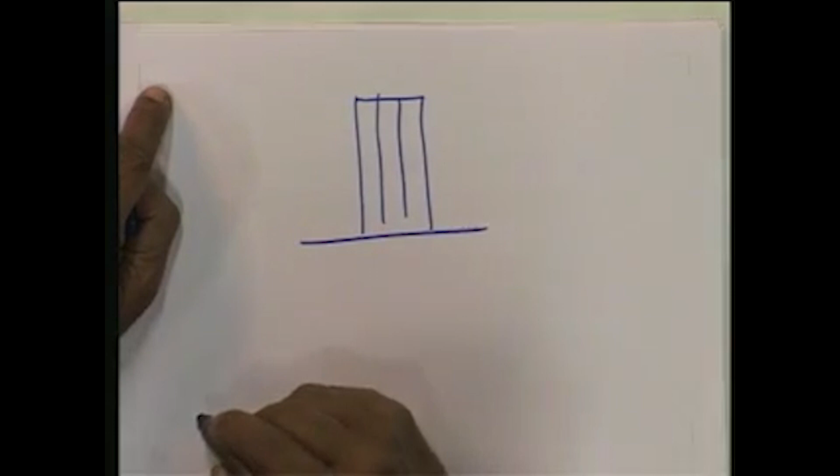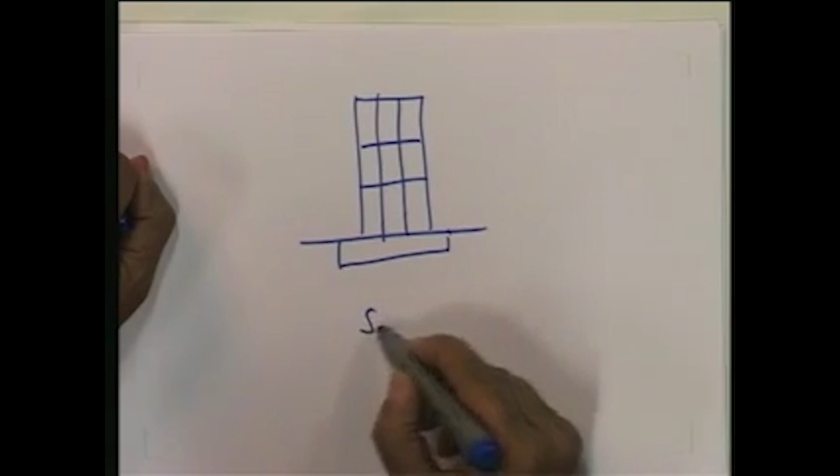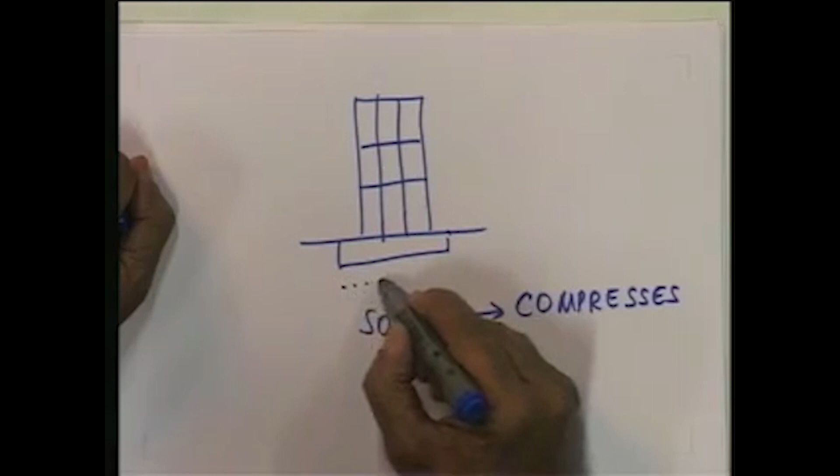See, for example, suppose there is a building and let us say there is a foundation. Let me take a hypothetical single foundation. This foundation is going to impose stresses on the soil, due to which the soil is going to compress, and in turn this results in a settlement of the foundation and hence the building. The building as a whole also settles down.

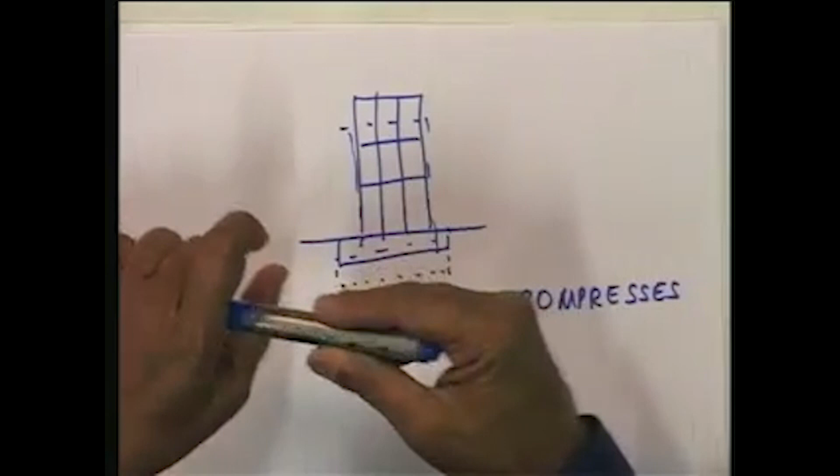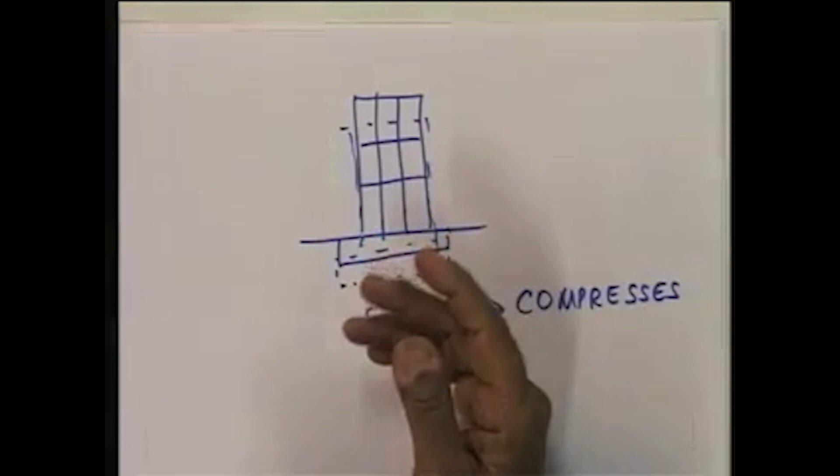Now, you can imagine that if the building settles down uniformly, perhaps the building will remain intact without undergoing any distress. But imagine the contact pressures not being uniform, the soil not being uniform, the foundation is then likely to undergo non-uniform settlement due to non-uniform compression of the soil. Imagine this building tilting like this. It is not going to be comfortable for the building at all when it tilts like this.

When it tilts, it may still remain in equilibrium, maybe momentarily, but if the non-uniform part of the settlement goes on increasing with time, then the building is definitely not going to be in equilibrium. It is going to undergo tremendous distress, which will manifest itself in the form of cracking of the building, cracking of its beams and columns, and in general disrepair. Now, at this point of time, your mind, I am sure, would have gone to visualizing a very well known building of this type.

That is the Leaning Tower of Pisa in Italy. The Leaning Tower of Pisa is an excellent example of a building or a structure that has undergone non-uniform settlement due to non-uniform compression of the soil below. The word settlement is related to the displacement, uniform or non-uniform, that the building will undergo. So, now what we have is a word called consolidation, which refers to the phenomenon that is exhibited by the soil when it is subjected to load.

That is the cause, and as a result of this consolidation, we have settlement of the building, otherwise termed as the displacement of the building, and that is called the effect of consolidation, the settlement. So we are actually dealing with a cause and effect. The cause is a phenomenon, the effect is a manifestation of a displacement.

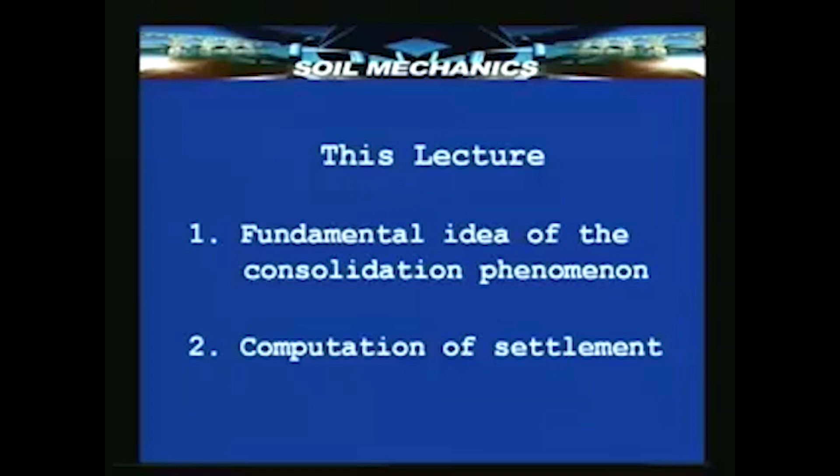In this lecture, we shall be seeing the fundamentals of the phenomenon of consolidation, and we will also see a simple technique for computing the resulting settlement due to exhibition of this consolidation phenomenon by a soil. As in the previous series of lectures, we raised a series of questions and tried to answer them. In the same way, in this series also, we shall raise a few questions.

I did explain the term consolidation as a phenomenon exhibited by a soil when it is subjected to some load. Having already seen in the previous set of lectures on stress distribution something called stress strain relationship for a material like soil, we can relate ourselves to that concept here also. After all, here also we are applying a load and visualizing the possibility of a compression, a displacement, or a change in volume, which is nothing but settlement.

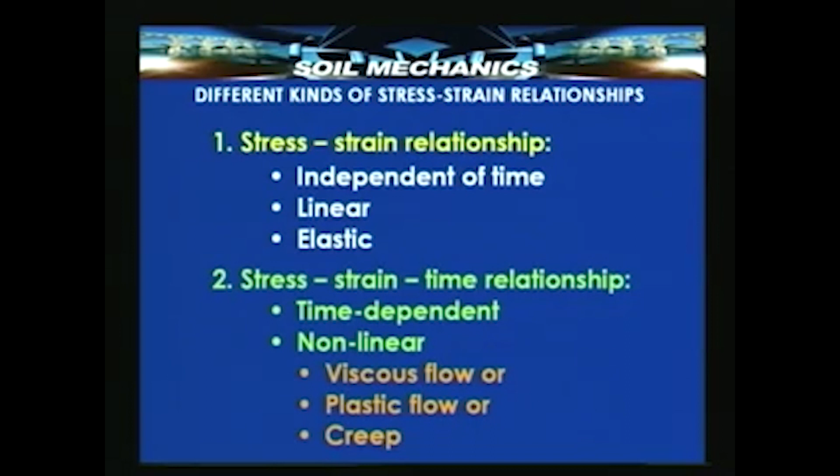So we have to bring in time in this phenomenon of consolidation, which we want to understand. Here it is not merely an instantaneous phenomenon where you apply a stress and there is a resulting elastic strain. This is also complex in the sense that it is not linear. The stress strain relationship is not linear here. What are the possible relationships then? They are all non-linear, and there are different possible relationships.

Viscous flow, that is, the soil undergoes displacements in a manner similar to a viscous liquid that moves. Or imagine a plastic material. It is not difficult to visualize what a plastic material is. You apply a certain stress, it will undergo a certain strain which may not be recoverable. Imagine also another form of this nonlinear behavior, that is creep.

You might have already been told what creep is in some lecture or the other. You must already have an idea that creep is nothing but continuously taking place strain under a constant load. Unlike elastic behavior, where the load is applied and there is a corresponding instantaneous strain which is recovered when the load is removed, here we have a load, and with the load remaining constant, the strain goes on increasing with time, and when you change or increase the load, the strain increases further and then again goes on changing with time.

And all these nonlinear forms of behavior are described not simply by stress strain relationships, but by stress strain time relationships. We are going to see one such form of stress strain time relationship which is relevant to the phenomenon of consolidation. Let us see further.

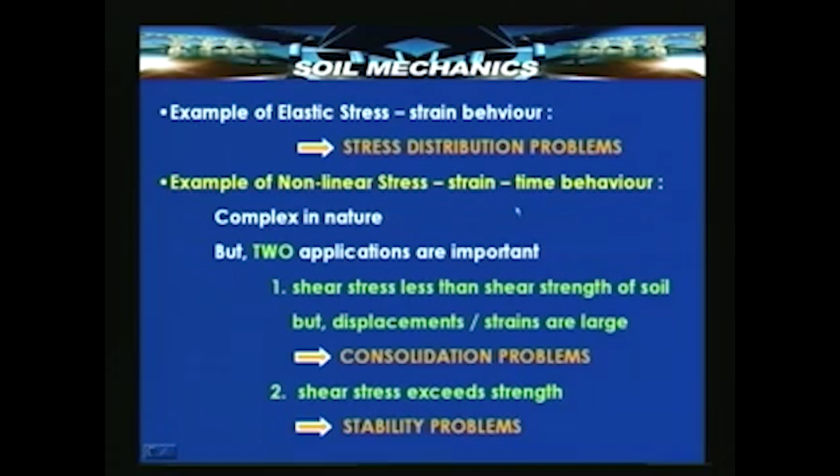Although there are several forms of nonlinear time dependent behavior, that is viscous flow, plasticity, creep and so on, there are two nonlinear phenomena which find tremendous applications in the field of soil mechanics. Of the various applications of the various phenomena, two applications are particularly important. One is when the shear stress imposed on a soil due to a structure is less than the shear strength of the soil.

Meaning the soil does not undergo shear failure, but the displacements or strains caused by the stresses may be so exorbitant that although the soil does not undergo a shear failure, it undergoes such a large strain that it is equivalent to failure. Such a problem is what consolidation is, and that is what is going to be the subject matter of a series of lectures now. So consolidation problems come under a case of large displacements and large strains.

Another possibility is the shear stress may exceed the strength and there could be failure of the soil. These problems are broadly classified as stability problems. There are variations in this: stability of an embankment or a slope, for example, stability of a foundation. All these are problems where there is shear failure, where the shear stress imposed by the foundation exceeds the shear strength of the soil. This class of problems is also of great importance in soil mechanics, and we shall take a good look at these after we go through this series of lectures on consolidation.

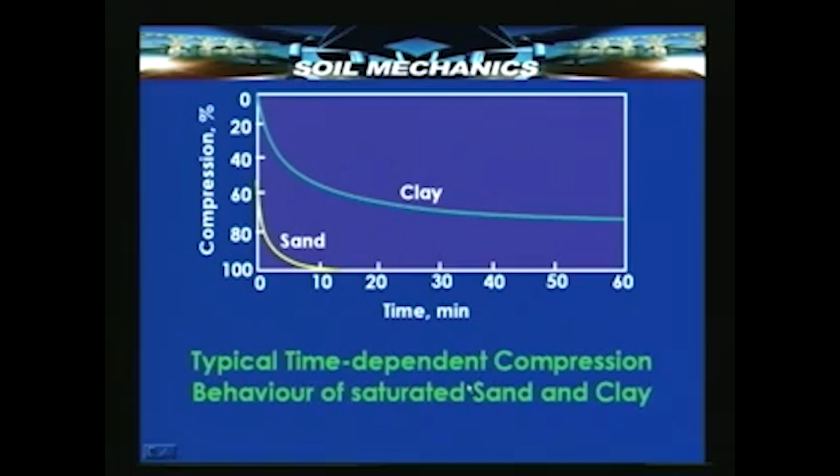Now, I have used the word saturated here. It has a special significance, and it is mainly only in saturated sands and clays that you find this kind of time dependent behavior. Let us study a little more in detail, particularly about the compression of clay with time, and that is nothing but the phenomenon of consolidation.

Let us go to fundamentals. The 3-phase soil model is known to you; I am sure you would have studied this in the very first, second, or third lecture. A typical soil consists of solid grains and voids. You can see here the solids component of the soil, and these two together occupy the voids, solids and voids. This combination of solids, any fluid that occupies the voids, and any gas that occupies the voids—in other words solids plus the voids together—the total soil is called the skeleton of the soil.

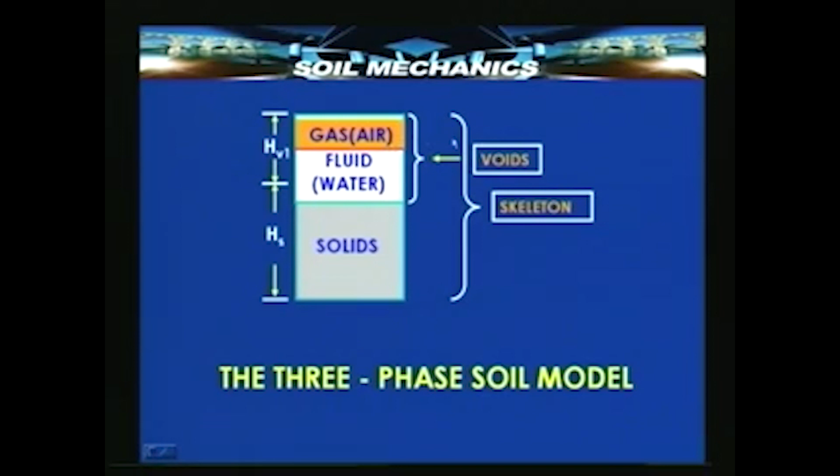The soil skeleton includes the solids, the fluid or water, and gas, usually air, in its voids, and this three phase model forms the very basis of illustrating and understanding how time dependent compression takes place in soils. So, compressibility—if you have a three phase model like this, what can the compression be due to? Suppose you apply a load here, what can the compression be due to? Let us try to understand this.

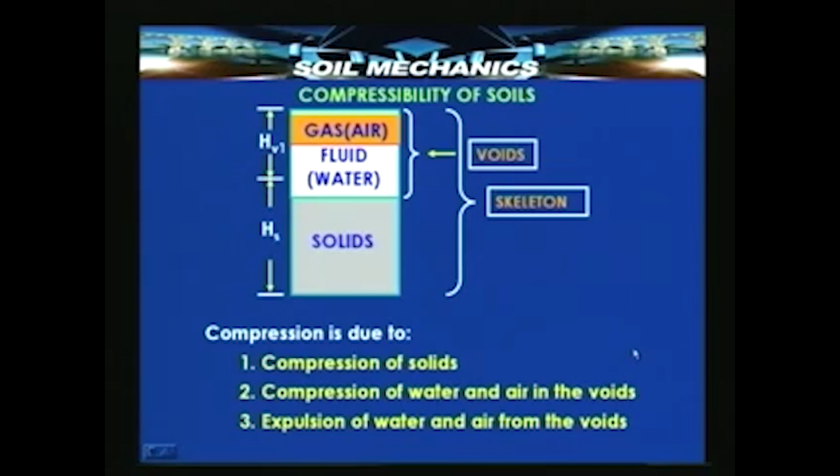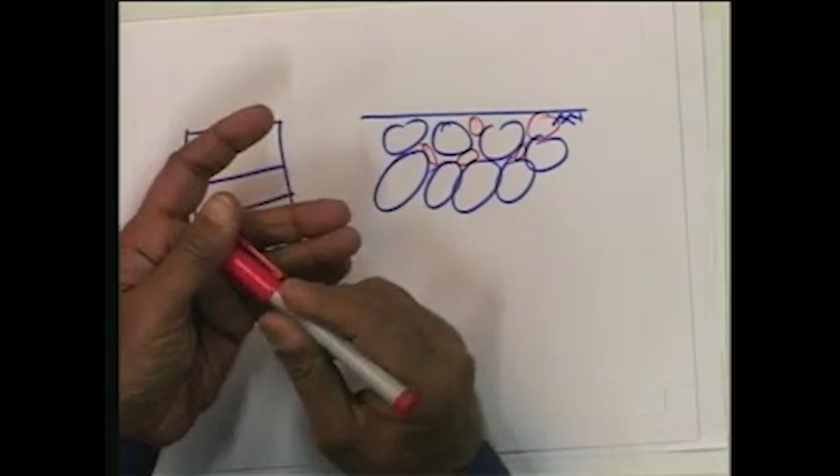In actual practice, the soil will not have three components distinct from each other. In actual practice, if this is the ground level, there will be solid particles and there will be voids in between. These are the solid particles and these are the void spaces. These red spaces are the void spaces, and these void spaces will be occupied by water or air.

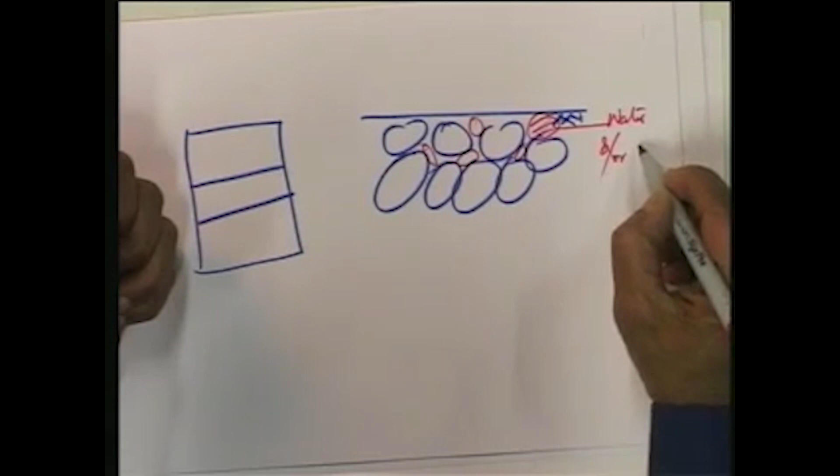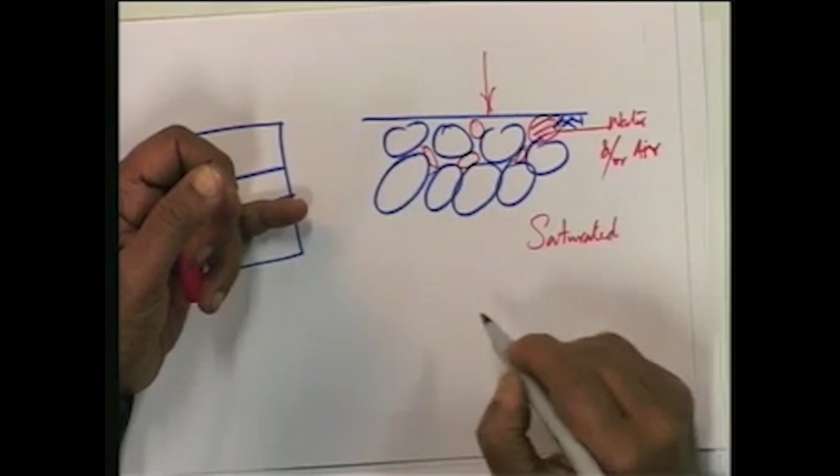But for convenience of understanding the phenomenon of consolidation, we will treat them as three separate phases: solids, water and air. If we do this, when we apply a load on the soil, and suppose the soil is saturated, meaning there is no air, and suppose we are considering clay, then a number of things will simultaneously take place. One is there could be compression of the solids, compression of the water phase, and also probably air if some air is there, if the soil is not fully saturated. If it is fully saturated, air will not be there, so there is no question of compression of air.

Plus there is another unique phenomenon that takes place: when you apply the load, water occupying the voids tends to move out, tends to get expelled, and that is also responsible for readjustment of the particles and compression of the soil. Therefore, the compressibility of soils is primarily due to three possible phenomena. One is the compression of the solids themselves, because any solid body, when subjected to a load, will certainly deform and undergo some compression.

Water and air which are occupying the voids could be the second contributory factor. The third one is the physical movement of the water or the air from the voids.

Some of these compressions, as we have seen a little while ago, could be elastic or non-elastic. Suppose a load is applied to a typical soil. Although we are talking about the consolidation phenomenon, in reality both elastic and non-elastic components of displacement will be there. The elastic components take place instantaneously. It is the non-elastic component, which is time dependent, that is of importance to us in understanding the phenomenon of consolidation.

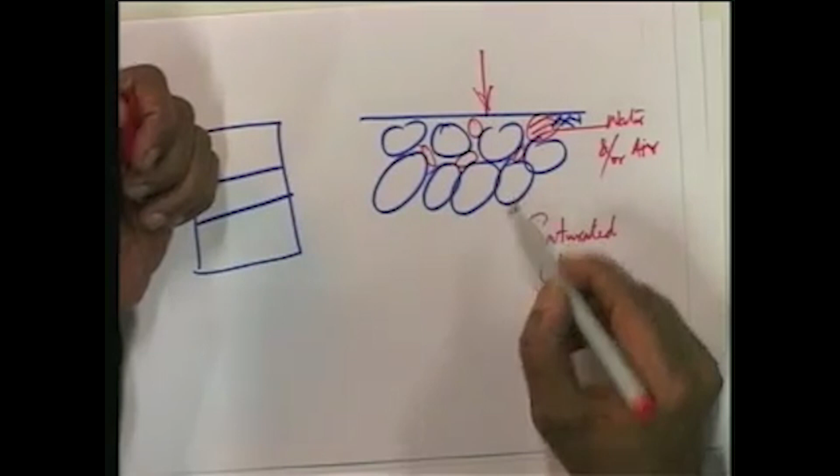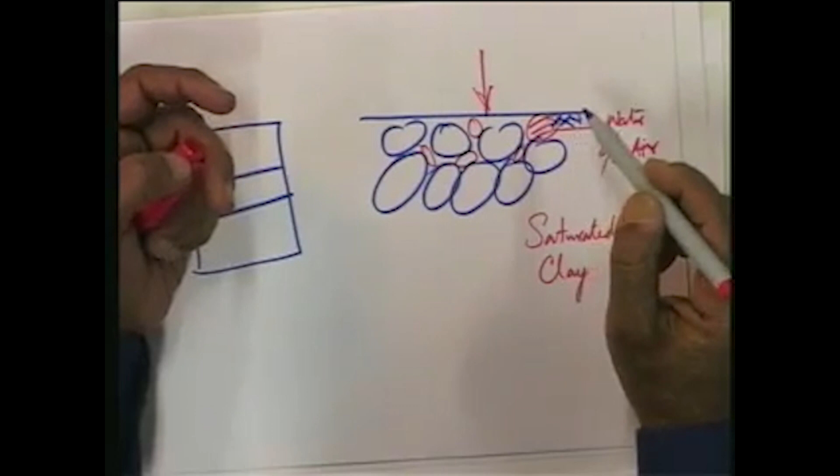So imagine we are applying a load here. We have already said that the solids are incompressible, or the minor elastic deformations that the solids undergo are negligible or instantaneous. So the next phase is the water, and if the soil is saturated, then all the voids are filled with water, and water is incompressible.

If water is incompressible and the solids are also incompressible, then how is the compression going to take place? The compression takes place because the water will move out of the void space when subjected to a load, and as the water moves out, the particles get closer, reorient and readjust themselves, and the soil becomes more compact and dense. That is what contributes to the consolidation phenomenon.

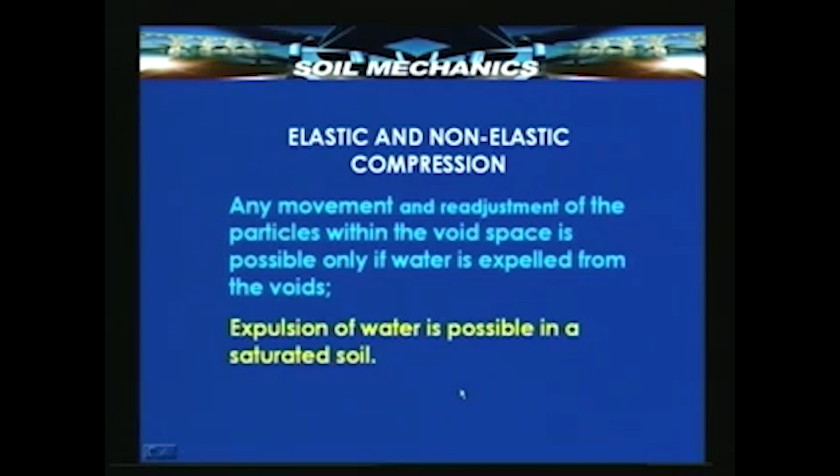So any movement and readjustment of the particles within the void space is only possible if water is expelled from the voids, and expulsion of water is not impossible. It is physically possible and in fact unavoidable, because water is incompressible, and if you apply a load to a porous material like soil occupied by water, the water has to make way for the solid particles to get together.

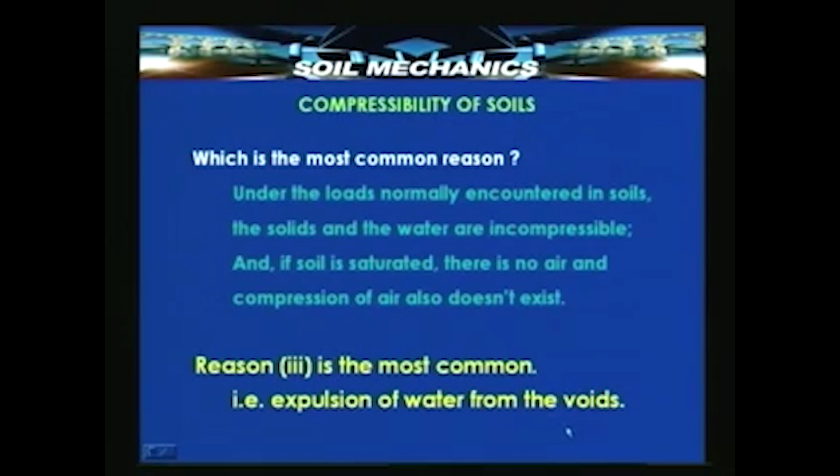So what is the most common cause for the consolidation phenomenon, of the various possible causes that we saw? The most common cause is that under the loads normally encountered in soils, the solids and the water are incompressible, and if the soil is saturated, there is no air and no compression of air is possible. Therefore, reason three, the expulsion of water from the voids, is the most common reason for consolidation to occur.

The word saturation is very important, because if air is there, it will undergo compression, and only then will the load get transferred to the water, and when water goes out, the load eventually gets transferred to the solid particles. So the phenomenon of pure compression leading to consolidation and settlement is manifested mainly in saturated soils. Compression of air is important only in partly saturated soils. If the soil is fully saturated, air is ruled out, and consolidation is important for saturated clays.

Clays are sedimentary deposits, and usually they are saturated, and therefore saturated clays are a very common occurrence all over the world, especially in coastal areas.

There are a number of different types of clays which are world famous. For example, in the Bombay region, where this lecture is being recorded, we have what is known as marine clay, formed in a marine environment near the coastal region of Bombay. Wherever there is a coast, you will find this form of marine clay. There is a form of clay well known in Bangkok, Thailand, known as Bangkok clay. There is also a form of clay well known as London clay, which is slightly bluish in color and called London blue clay. There are several other forms of clays as well.

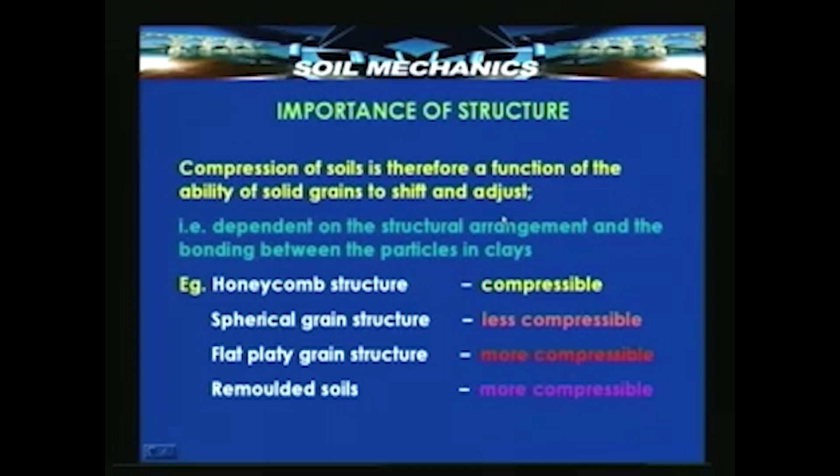So honeycomb structure is compressible, but relative to that, the spherical single grain structure is less compressible, platy structure is more compressible, and remolded soils in general are much more compressible than all these. Compression of soils is therefore a function of the ability of particles to shift, move, readjust and realign, which depends upon the type of structure and varies from structure to structure.

Let us make a formal definition: the gradual process of simultaneous slow escape of water from voids and gradual compression of soil is what is called consolidation. So there are two gradual, time-dependent processes in action. One is the gradual escape of water, and simultaneously there is a gradual readjustment of particles and compression of soil.

This is what consolidation is all about. Another way of putting it: consolidation is a gradual process involving drainage, that is expulsion of water, compression, and stress transfer. This is a new word I have introduced. When you apply a load to a saturated clay soil, ultimately the load has to be taken, otherwise the building is not going to stand. Where does this load go?

When you apply the load, the water, being incompressible, starts going out of the void spaces. So it is not helping in withstanding the load ultimately. So where does the load go? The load goes to the solid grains ultimately.

So the solid grains realign themselves, readjust themselves, and ultimately there is a certain form of stress distribution within the group of solid particles, and therefore a transfer of the load takes place to the solid particles. The consolidation phenomenon is nothing but a phenomenon of gradual expulsion of water and compression of the soil, which ultimately leads to the safe transfer of the structural load through a foundation to the solid particles.

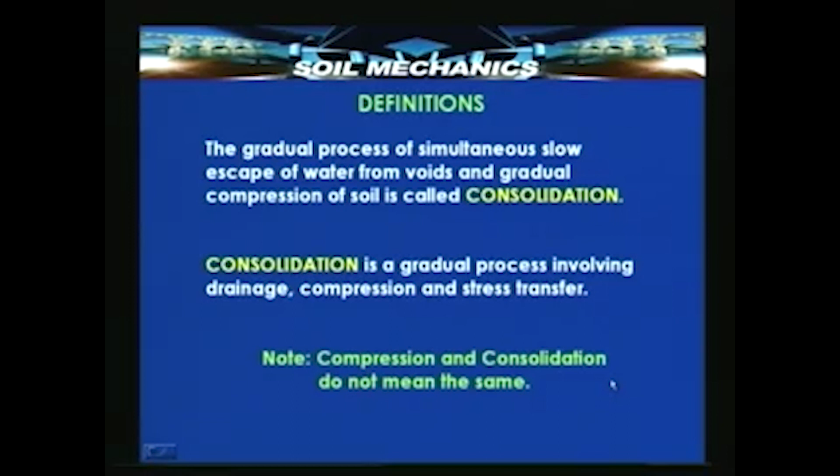So you will notice that the two words compression and consolidation do not mean the same. Whereas compression is a phenomenon, consolidation is a process. Very broadly we may put it like that.

Well, now we come to a very important concept, and this is what is going to help us understand the phenomenon of consolidation.

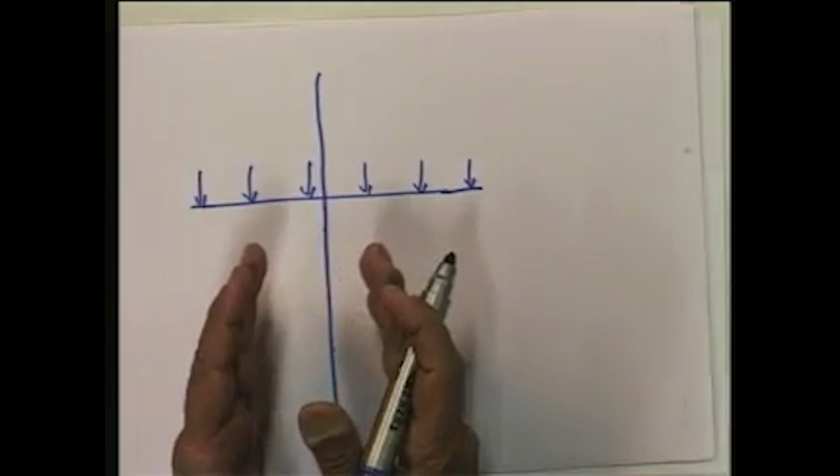You remember that when we were dealing with stress distribution in soils, and when we were talking about a uniformly distributed load over a large foundation on the surface of a semi-infinite soil medium, a large area subjected to a load essentially causes transfer of load in the downward direction, but due to Poisson effect it may also affect the lateral directions. For all practical purposes, when you have a large loaded area, the center line or points below the center undergo maximum stress, and as you go away from this, the stresses go on decreasing.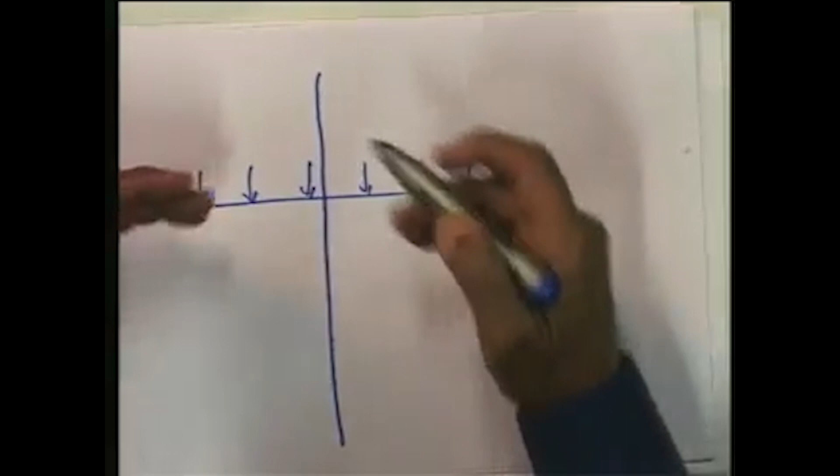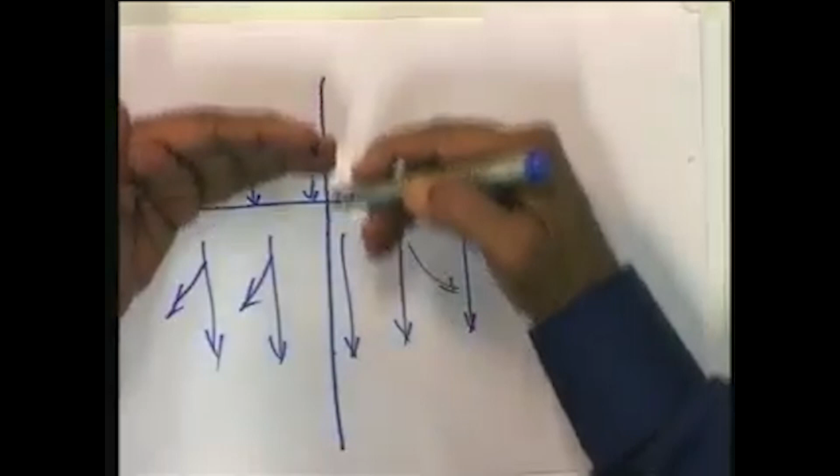In a similar way, when we have a very large area subjected to a uniformly distributed load, for all practical purposes the movement of the water in the saturated clay is essentially in one direction. Another way of putting it is, even if the water gets expelled like this, the movement of the solid particles is essentially in one direction, that is in the direction of the load, and this is known as one-dimensional compression, or more often one-dimensional consolidation. This considerably simplifies the problem of understanding the phenomenon of consolidation.

It is not difficult to visualize that the phenomenon of consolidation is basically a 3-dimensional phenomenon. There is a foundation which is 3-dimensional, experiencing a load, and therefore when it transfers the load in 3 dimensions, the soil compression also will take place in 3 dimensions. It is essentially a 3-dimensional problem.

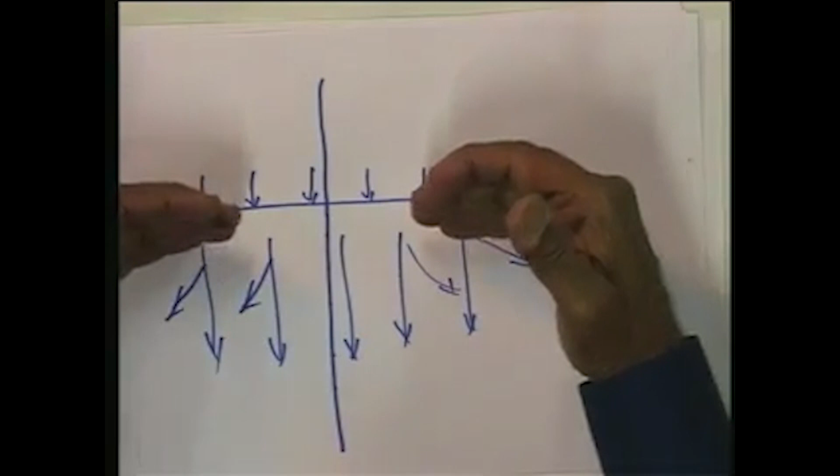But in order to simplify our understanding and make it easy to apply in practice, let us assume a simplified model, that of one-dimensional consolidation. What it means, as I said just now, is when a load is applied over a very large area, by and large, although the water may be oozing out in 3 dimensions, the compression of the soil is essentially in the direction of the load, that is in one direction, and this is what is known as one-dimensional consolidation.

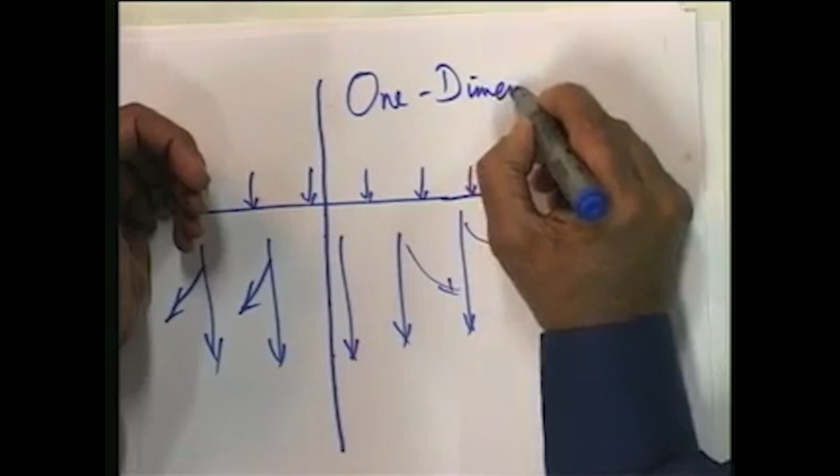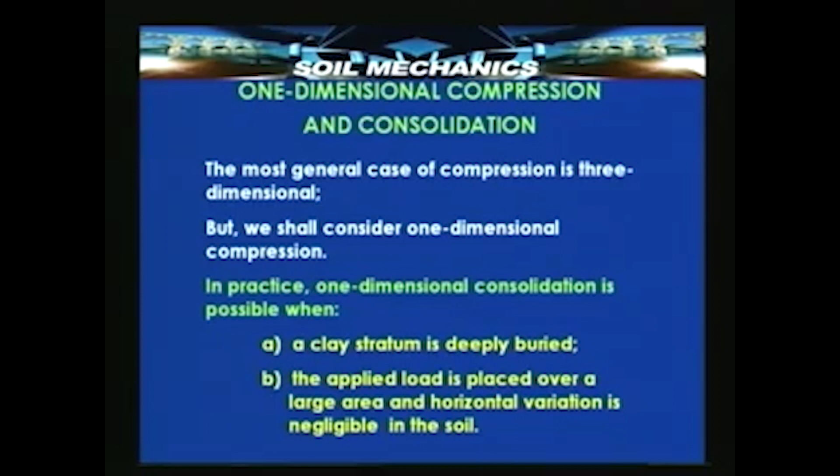And this is what we are going to initially see. We will later on see a special form of 3-dimensional consolidation, which is of very great practical importance. So, the most general case of compression is 3-dimensional, but we shall consider one-dimensional compression for the reason which I explained just now. It merely helps us understand the phenomenon of consolidation in a simple way.

In practice, where is one-dimensional consolidation applicable? Now, we cannot have a theory, a simplification or idealization which is not acceptable in practice. Therefore, is this one-dimensional consolidation possible and applicable? Yes, it is possible, as I said some time back, when a clay stratum is very deep compared to the lateral dimensions of loading, and the applied load is placed over a very large area, and horizontal variations in the soil are negligible.

When the soil is more or less uniform in the horizontal direction, when the thickness of the soil layer is very high, or when the clay layer itself is lying at a very deep level, or when the load is spread over a very large area - these are the 3 conditions under which one-dimensional consolidation is valid.

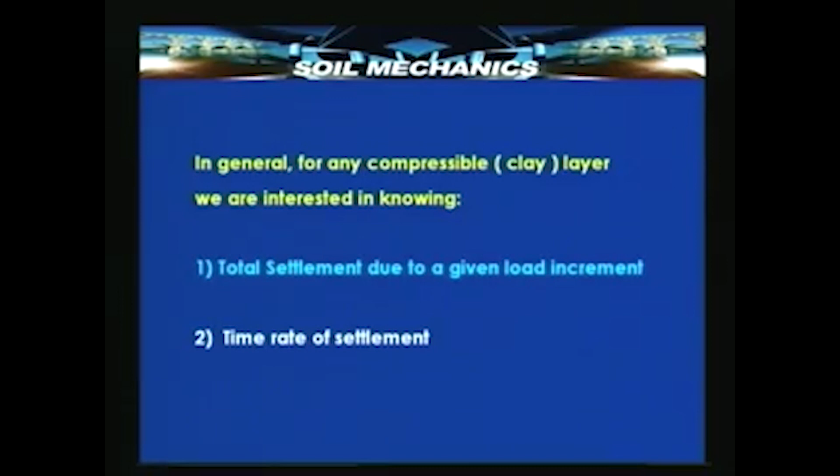In general, for any compressible clay layer, we are interested in knowing 2 things. One, when you construct a building, you have to design it keeping in mind the possible consolidation and settlement effect, meaning we need to know the total settlement the building will undergo over its lifetime when constructed over a saturated clay soil layer of finite known depth. Another question is at what rate this settlement is going to take place.

Let us say the lifespan of a structure is 50 or 60 years. We know there are many structures which are even 100 or more years old, but let us talk about a healthy structure 50 to 60 years old. Even if the settlement over its lifetime is not significant, it is important to know at what rate the settlement takes place. Is it going to take place over the entire 60-year lifespan, or mostly in the first 10 years, or in the next 20 years? These kinds of questions arise.

So with respect to consolidation and settlement, we need answers for 2 basic questions: what is the total settlement, and what is the rate of settlement? We call it the time rate of settlement in the theory of consolidation. It effectively means at what rate, or in how much time, a certain known settlement takes place.

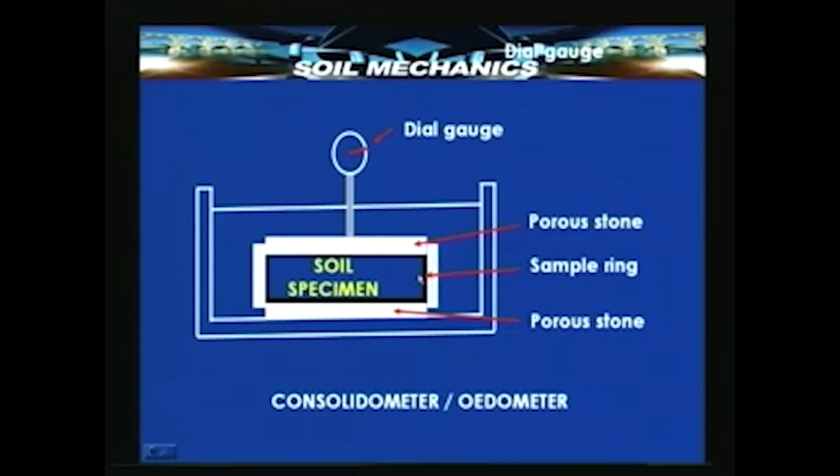This means the soil specimen is fully saturated, and when you subject it to a load and measure its deformation with a dial gauge, as the soil undergoes compression due to expulsion of water, the water must have a passage for expulsion - these two porous stones provide the needed passage. The water can go downwards or upwards, and expulsion of water in both directions leads to compression of the soil essentially in one dimension. This is largely an experiment which enables us to do, at the laboratory level, a one-dimensional consolidation of soil.

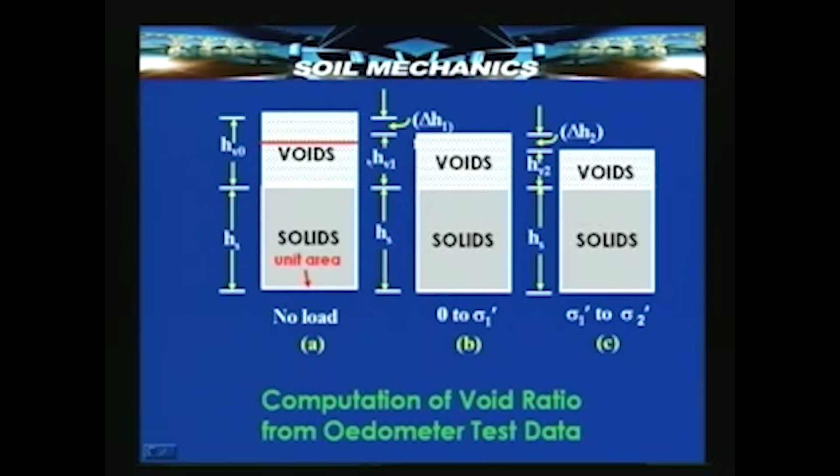So suppose there is a soil layer in the field - we bring a soil sample, extract it and put it in this apparatus, subject it to a load, and measure the compression with the dial gauge. Then we can measure this compression, and from the compression we can calculate the change in void ratio. Once we know the change in void ratio, we can compute the total change in thickness of the sample, which is nothing but the total settlement of the sample.

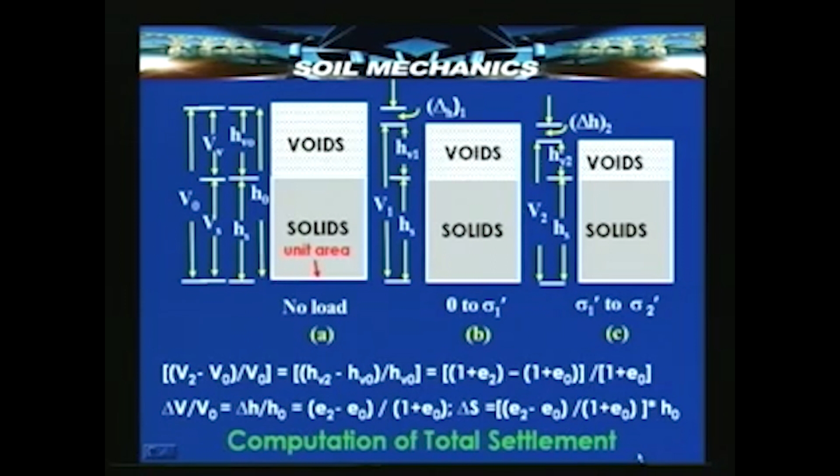So with this, in today's lecture we have seen the consolidation phenomenon in great detail and understood it to be a phenomenon that takes place mainly in saturated clays due to expulsion of water, which takes place very slowly because of the low permeability of the soil. We have also seen that it is possible to compute the total settlement by doing a simple laboratory experiment called the consolidometer or consolidation experiment.

With this, we will pass on to the next lecture later on, in which we shall see the details of the oedometer test itself, and in detail the compression behavior exhibited by clays and the pressure void ratio relationships for clays in general, because we saw just now that the settlement depends upon the change in void ratio. Thank you.